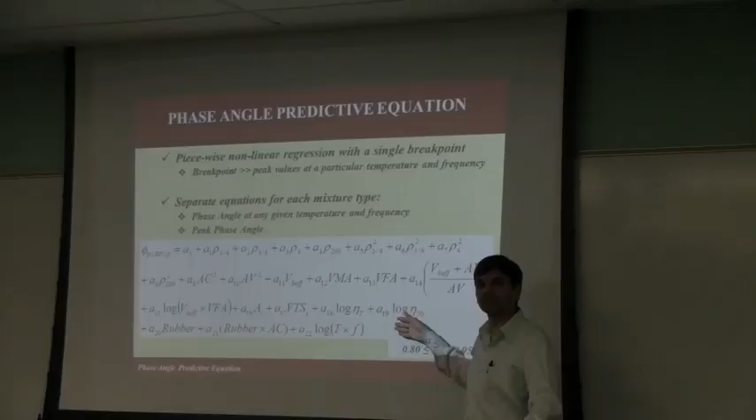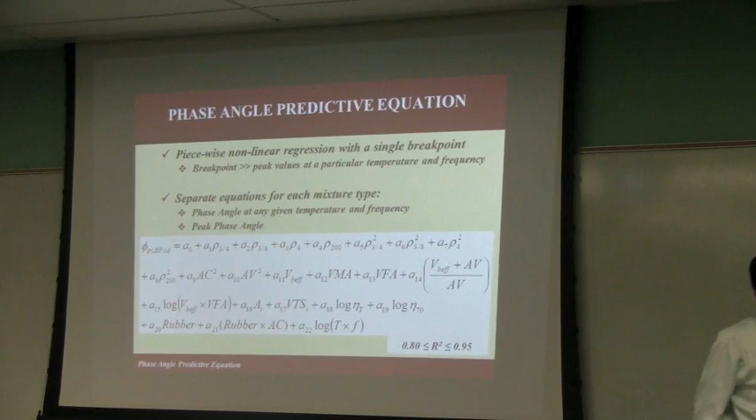Slightly better. Right now this is a non-linear... meaning it's still a linear model. Okay, but we can change this in terms of this. One of the ideas will be to change this to this pattern.

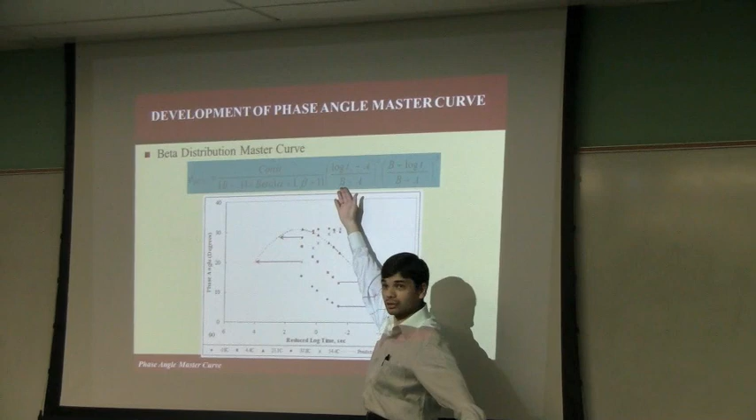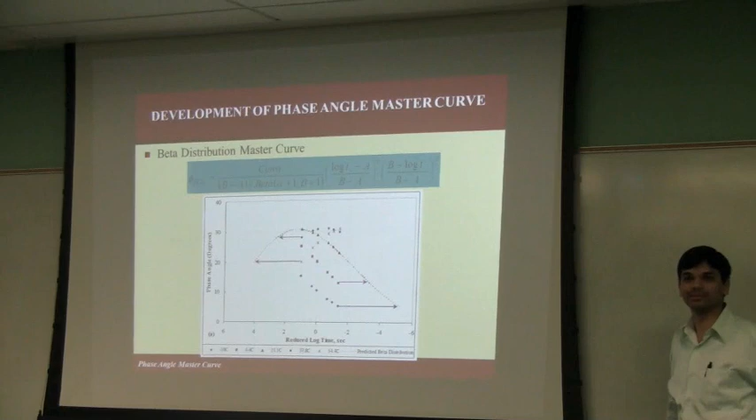The same pattern that you see in real experiments. It will be a beta distribution that we can use, or a similar distribution, maybe a normalized distribution. But at this time, that's the only one we have right now. We haven't validated it yet. That'll be the next step.

This is more of advanced science that was done recently. If you consider phase angle relation with vibration of the material, does vibration really affect more of the structures part here, going more deeper into the material science? I don't know if we have more time here, but...

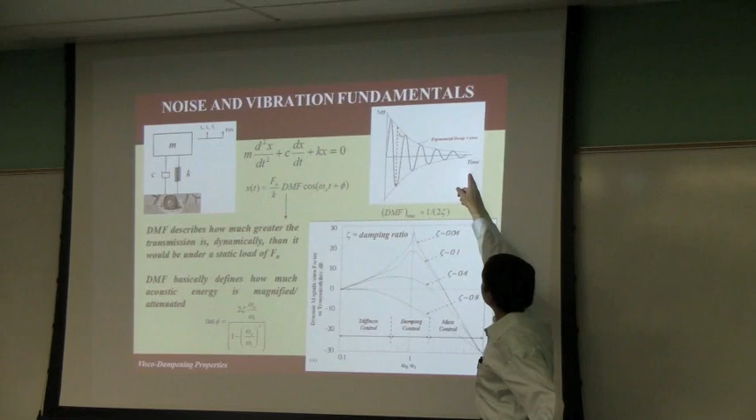Assuming that noise is very similar to a harmonic motion, like you're walking on a surface, there is a decay, an exponential decay of noise with respect to time. Okay, so that's what you see here. So there could be three components, and this is coming from acoustics, physics.

So there are three different components. One of them is stiffness, which is inherent of the material, or which is coming from the E star that I mentioned. So that's one parameter, but there could be strength as well. Stiffness is already an inherent characteristic of the material.

Then there is mass, which you measure. But then there is something called C, which is the damping coefficient. So each material has its own damping characteristics. It's more of the acoustics that we are dealing with.

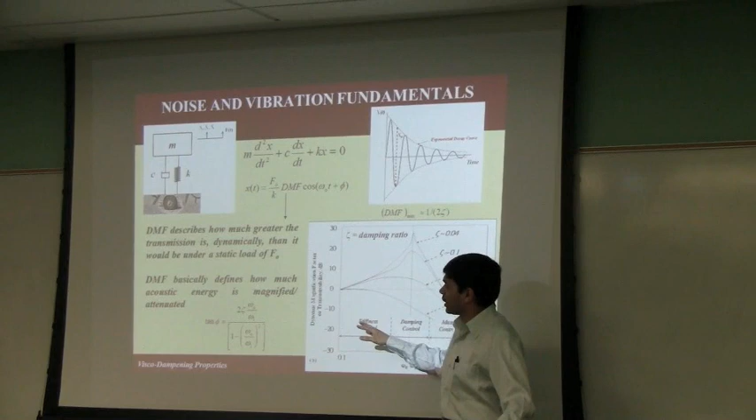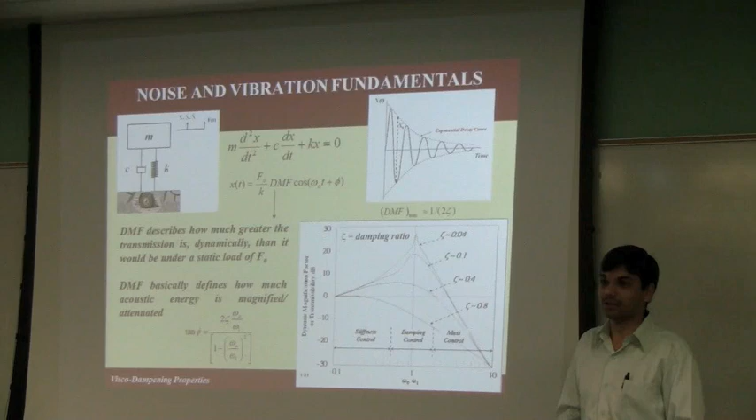So, advanced science here. When I actually researched, there was a relationship with phase angle and the critical damping coefficient. That's already there in the literature, but we haven't used this in terms of how we can characterize noise in pavements.

What was done here is that we characterized the same material, because we had phase angle values for all these mixtures. We could characterize into three different zones: one is stiffness control, damping control, and mass control.

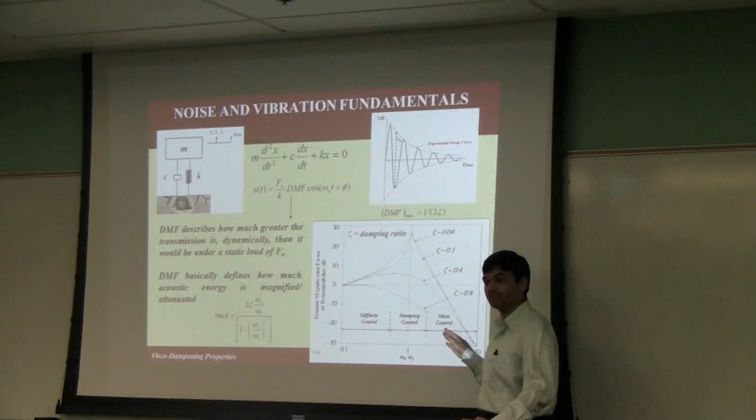The thing here is that mass control is very difficult to really control, the mass component. Because it can change due to volumetric changes, there could be changes in the material.

And stiffness can be really controlled. If you load the material with one vehicle versus 10 vehicles, you can actually vary that, so it's really very easy to control. In a real field scenario, if you want to control the material's noise, you will have to control this damping part.

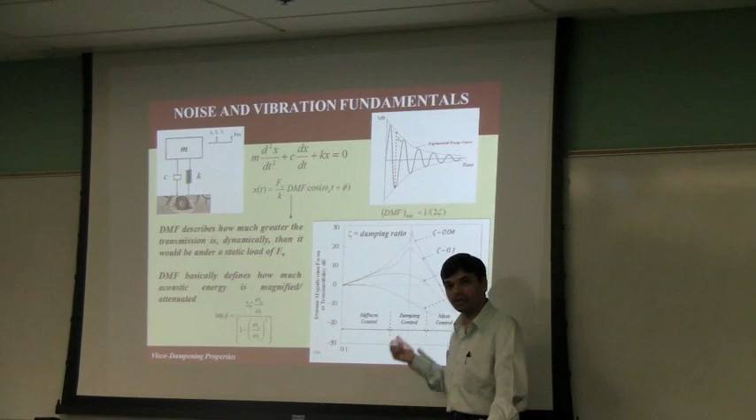So what was done was to calculate damping ratios of the material and relate it to phase angle. And what was found here was really interesting. This is actually just a 2-month-old study, so I included that in this presentation.

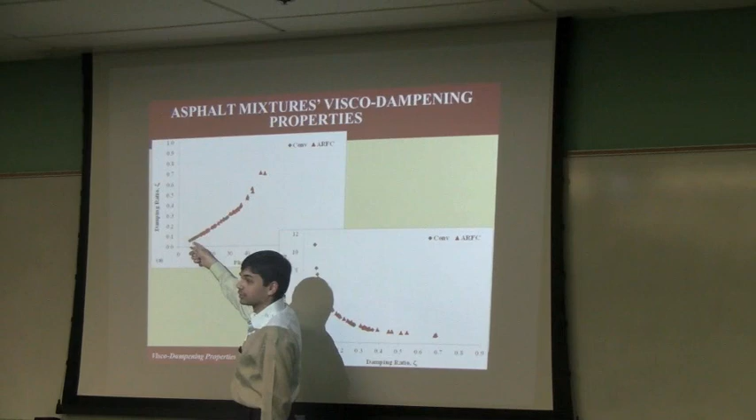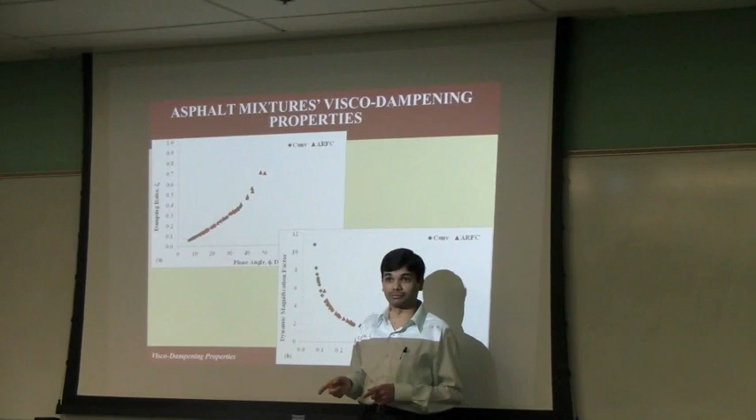You see that the black color points here are the conventional materials. The phase angle values are by themselves lower, as you had seen before. So the damping ratios were also lower because they are both directly related, directly proportional to each other. But for asphalt rubber mixtures, it was really higher damping that you saw.

The damping ratios are almost closer to about 0.7, and that's what you want - you want the material to be really less noisy.

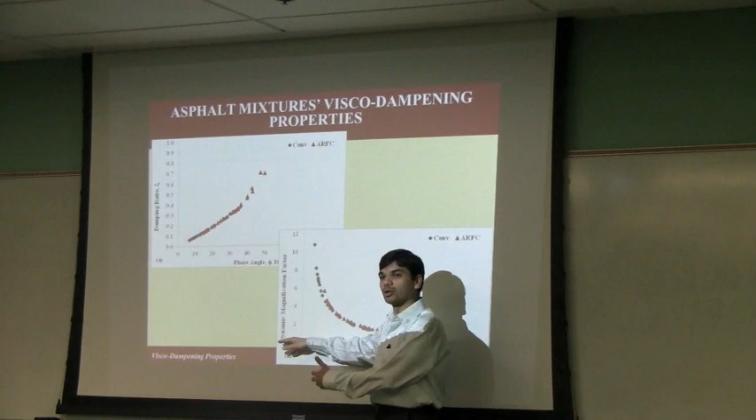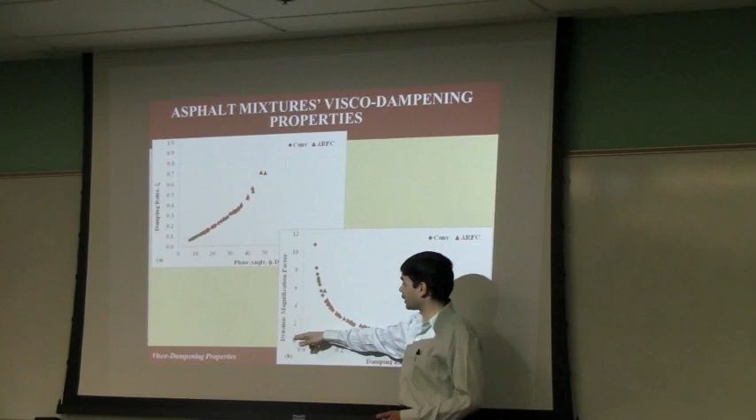When you compare the dynamic magnification factor - this is one of the other parameters there in physics - this factor defines if the material really absorbs or reflects noise, reflecting the damping part. We found that asphalt rubber materials have not only higher damping ratios, but lower dynamic magnification factor. What does that mean? It actually does not magnify, but it actually attenuates.

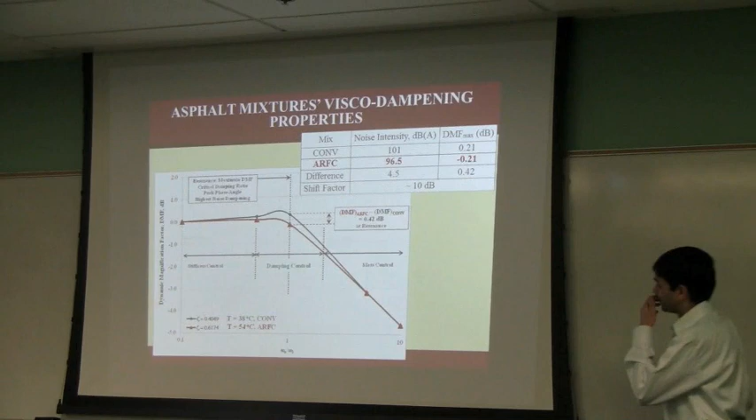It reduces noise. So what was done in the next stage was to actually calculate this. It was really replicated from the theory, into 3 different zones, where we already have the peak phase angle values.

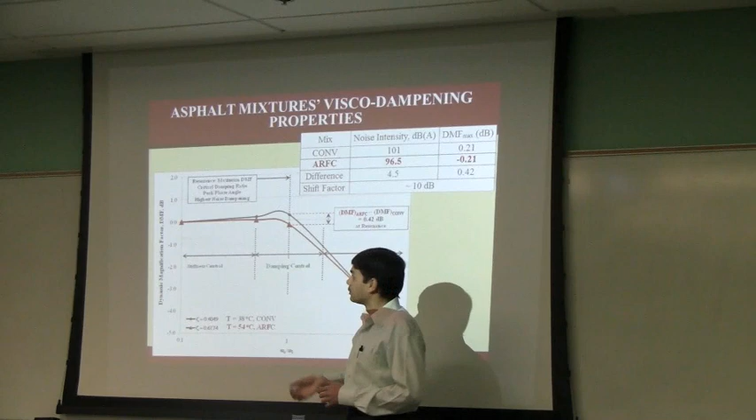From the experiments, we confirmed that this is one of the distinguishing parameters that can characterize noise of different materials. Using that, we could calculate the dynamic magnification factor at peaks, or peak resonance, meaning high damping.

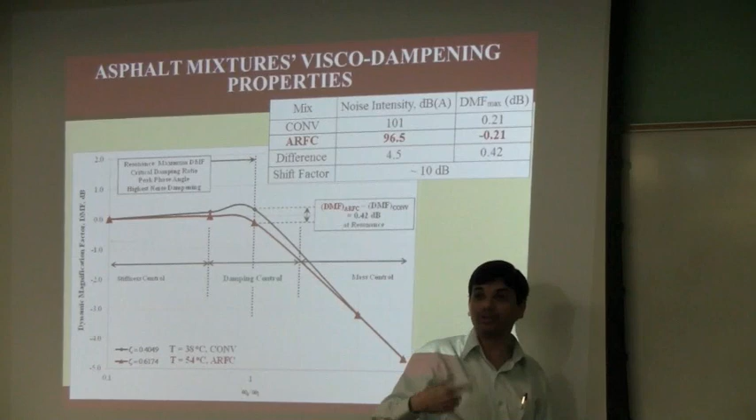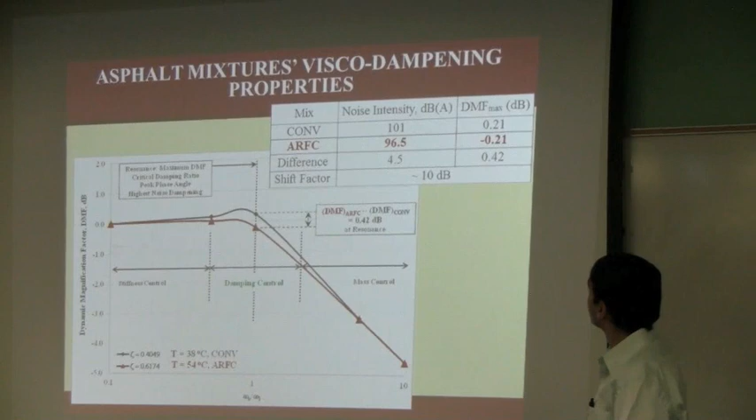So we found that there was about half a decibel difference. We translated the dynamic magnification factor value into a normalized decibel scale, and saw a 10 decibel unit change. This table gives noise intensity values for two different materials, conventional versus asphalt rubber, along with the dynamic magnification factor at peak or resonance translated to decibels. We have about 4.5 decibels average difference here, and about half a decibel here.

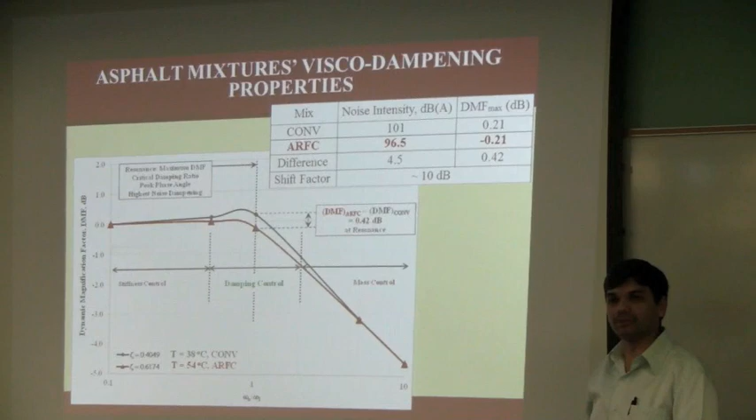There could be some shift. This is still under development, so I'm just showing you some slides here. But we could easily characterize that in the damping zone there was a difference in dynamic magnification factor.

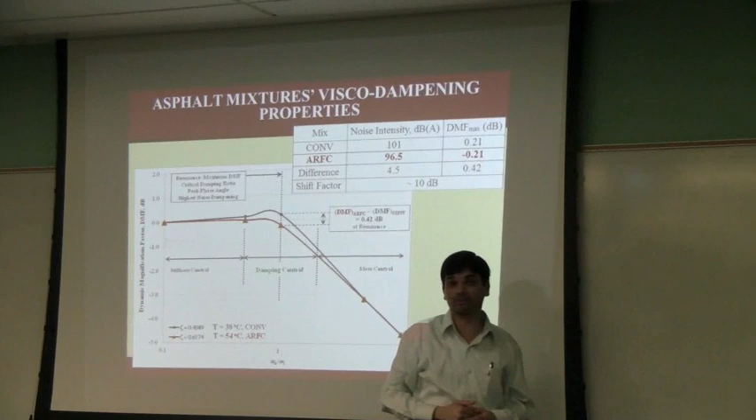So how did we relate our phase angle values to field noise? Higher the values of phase angle, or the peak values, lower was the noise coming from the field.

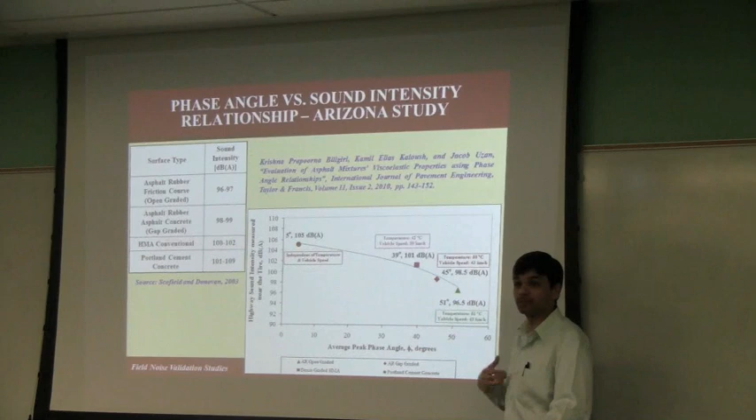We also had the frequencies or speeds at which this low noise could be achieved for different materials. At 43 kilometers per hour, we could achieve the lowest noise for asphalt rubber mixtures—that's about 45, which is about 25 to 30 miles per hour. So we're able to see those changes for different materials.

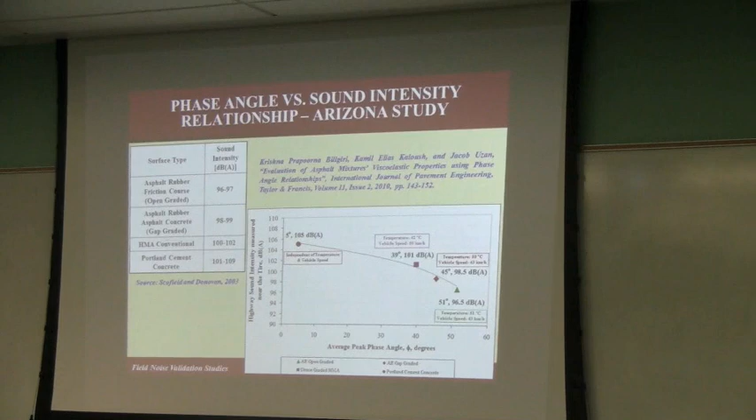That's the same table you saw in the beginning. So using this, if we know the phase angle values and the noise characteristics, we can actually achieve this.

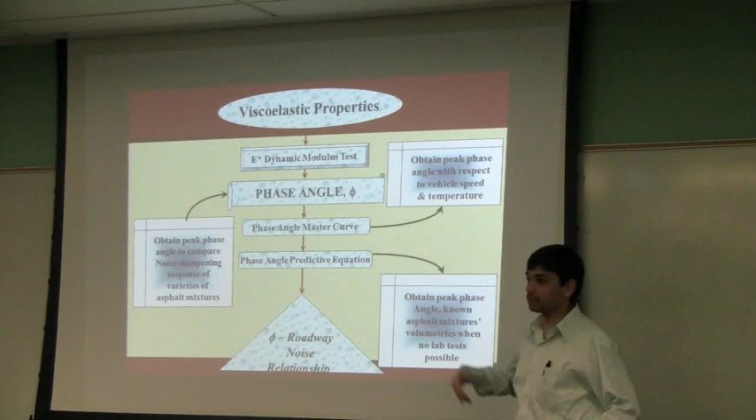This is more of the science or lab part to distinguish different materials. The same concept can be used for different materials—it could be polymer modified, or with different proportions of rubber in the material, 10 versus 20 versus 30.

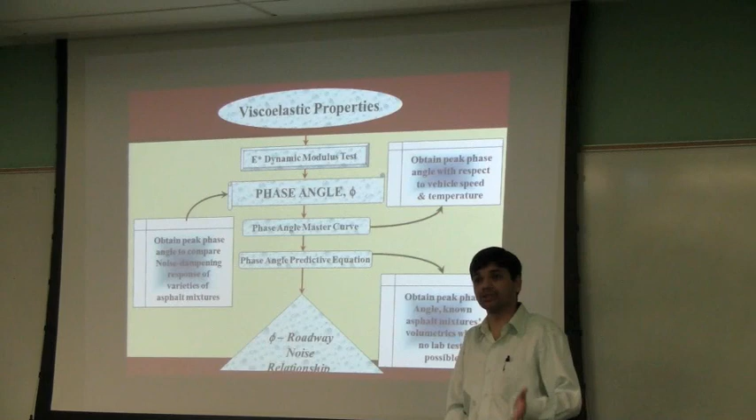Okay, so this is the first part, and I think I covered the whole thing in one hour. I think this next part will go faster.

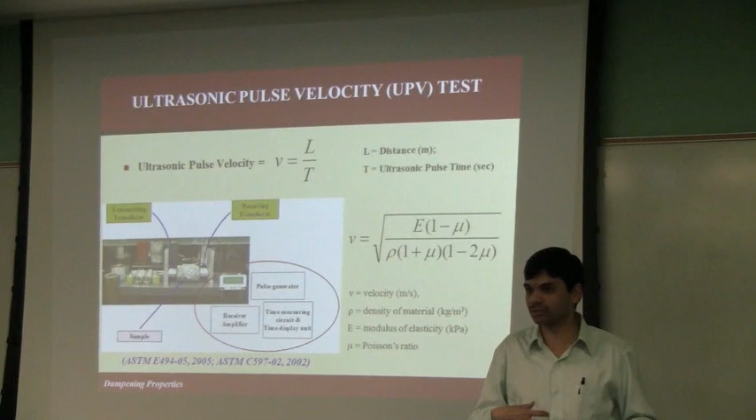The Federal Highway Administration noise model I showed you in the beginning had one part which could be changed, which was the flow resistivity. As the name suggests, flow resistivity means flow is resisted by the material—it's being absorbed, the noise is being absorbed. The lower the value, the better it is.

How could we actually characterize that in the lab? There's no test at all in the world that can characterize that value. If we can contribute these flow resistivity values for different materials, that can be directly input into the Federal Highway Administration noise model—that will be one of the major contributions from the materials aspect.

We used an already existent experiment in ASTM, ultrasonic pulse velocity, which is used to measure cracks in concrete, and you can get the values of ultrasonic pulse velocity. Here you're impinging a wave in an ultrasonic range, higher than 20,000 hertz, using a transducer which is 25, 30, or 40 kilohertz or megahertz.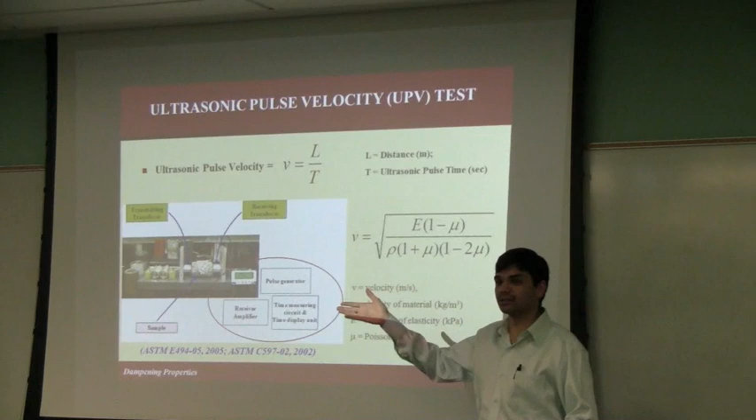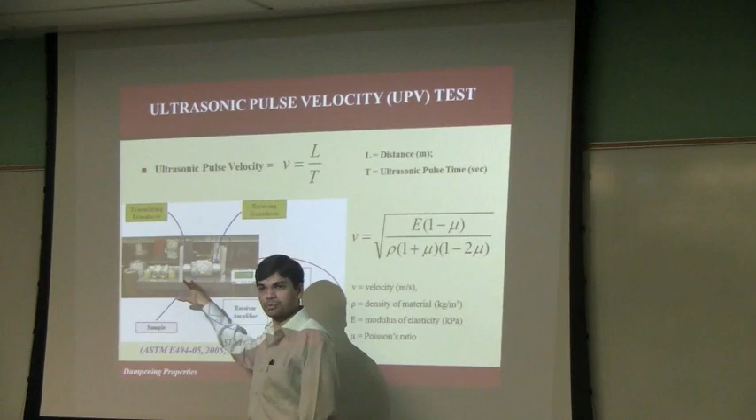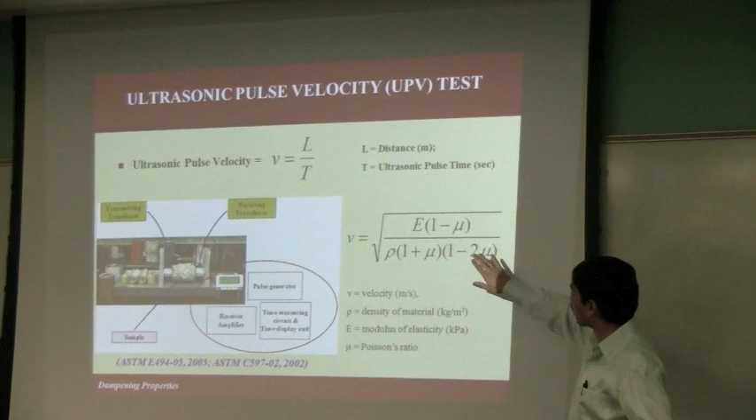You impinge a wave through one transducer and capture it at the end of the other sample, then translate that into velocity. Basically, you have a sample, impinge a wave from one transducer, and it traverses through the sample, so you're capturing the time it takes from one end to the other. Then knowing the sample length, you can calculate the velocity of that acoustic wave. It's already there in the ASTM standard.

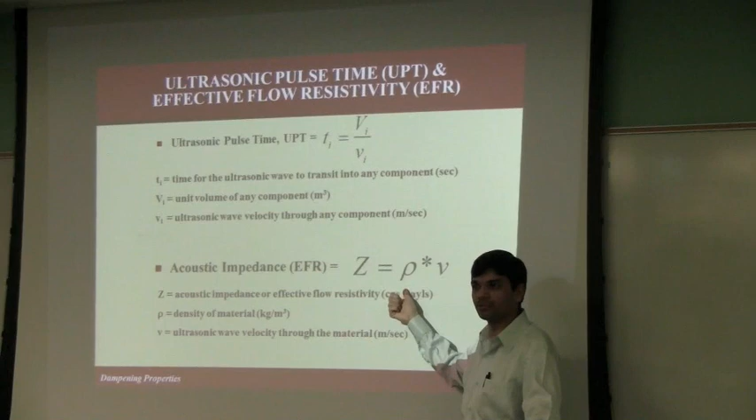So what did we do with these velocities of the different mixtures? We could calculate something called the impedance, which is still a material property. You know the velocity coming from the experiment, and you know the density of the material from the mix design—if you take the product of these two, you get the impedance value.

And what is this impedance? It's nothing but the effective flow resistivity that's there in the FHWA traffic noise model, which has the same units, CGS rayls.

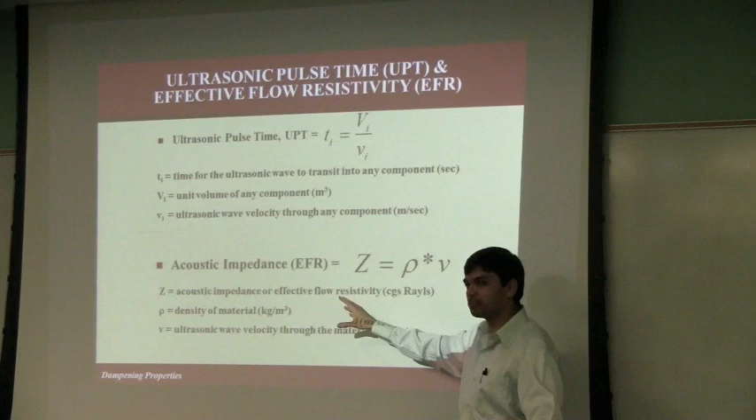So if you take the product and do some manipulation, you actually get to this unit CGS rayls.

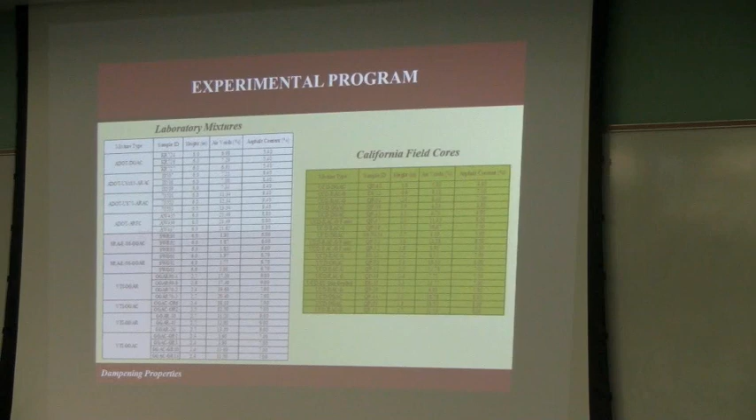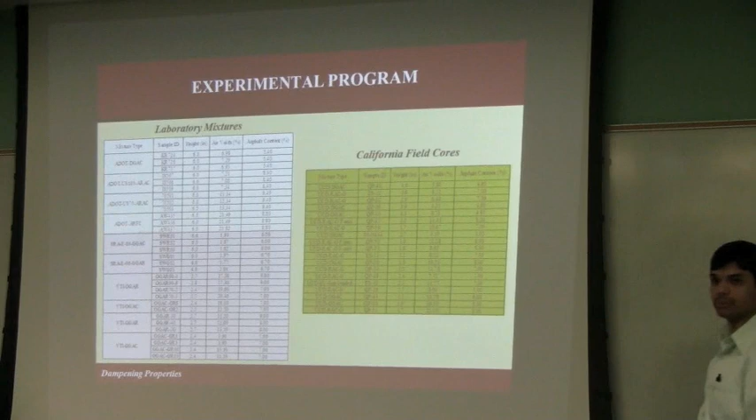So what did we do? We had 80 samples coming from University of California, Davis, as well as from Sweden and our own ADOT mixtures, for different asphalt rubber, open graded, with and without rubber. We also prepared some of them in the lab, and these are the field cores, taken out from California sites, from UC Davis, UC PRC, and we had some field cores from Arizona, California, and Sweden.

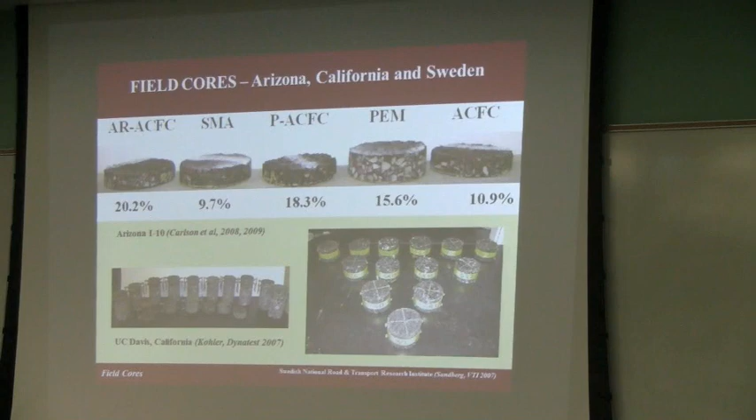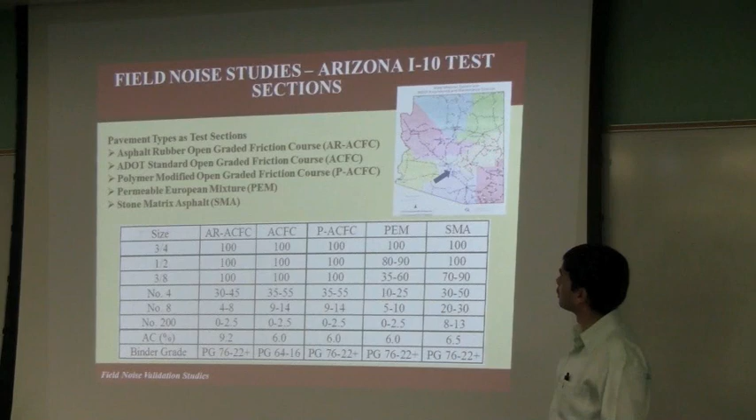So these are the pictures that you see. We also had some European mixes with and without rubber. This is the field site, very close, actually going towards Tucson on I-10. We had 5 different mixtures there, and I'll show you one figure which is really interesting.

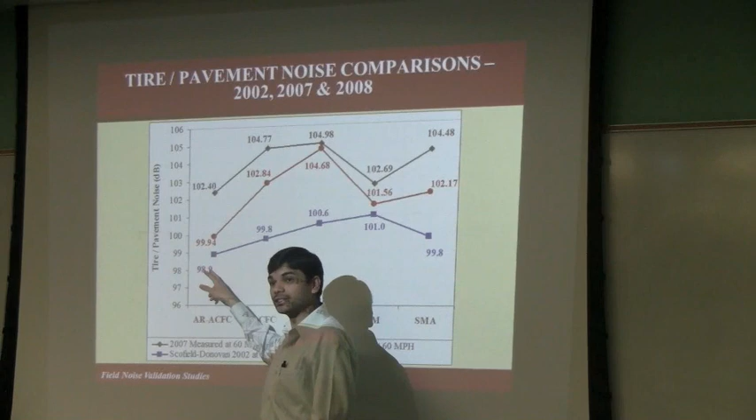The noise was measured at different times, in 2002, 2007, 2008, and actually in 2011 we measured it last year, but I don't have that here yet. We saw that asphalt rubber friction course was least noisy in all 3 years, and it still functions so well that there is no crack at all on those pavement sections. I had visited this last year. There is no crack at all, even after 12 years.

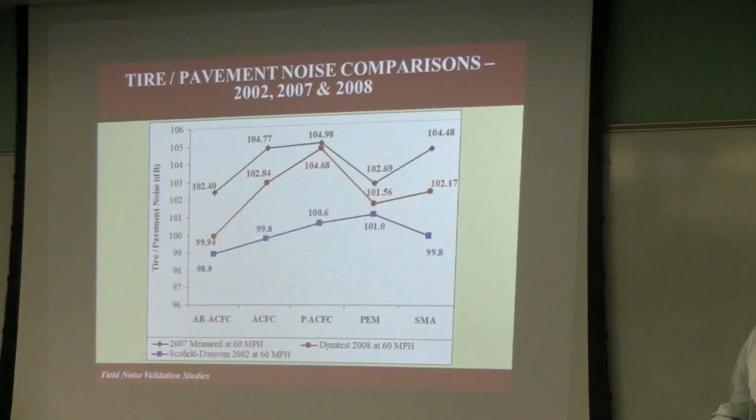But the other sections really developed cracks. And to answer the question you asked in the beginning, do these distresses actually change the noise characteristics? It does change. So when we went back to the data, this was taken immediately after construction.

The permeable European mix had cracks in 2007. But then the cracks started to heal in 2008, so the values started to reduce. And it was the other way around for another section: the cracks were not there here, and there were cracks in 2008, the values increased. So there is some association with the distress as well.

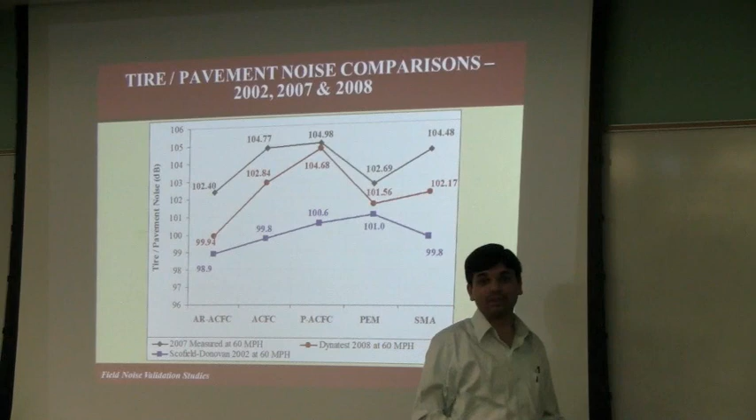There were no cracks at all whatsoever here. So what happened? Why did the values increase? Mainly because it started to age, and the binder effect started to diminish. So after 11 years of service, it has not cracked, but the noise characteristics have actually deteriorated. I would say about 3 decibels change, about half a decibel every year, which still goes back to the same literature we have seen.

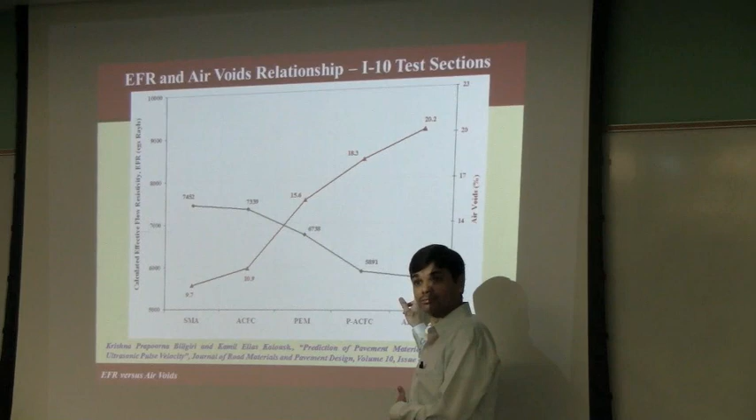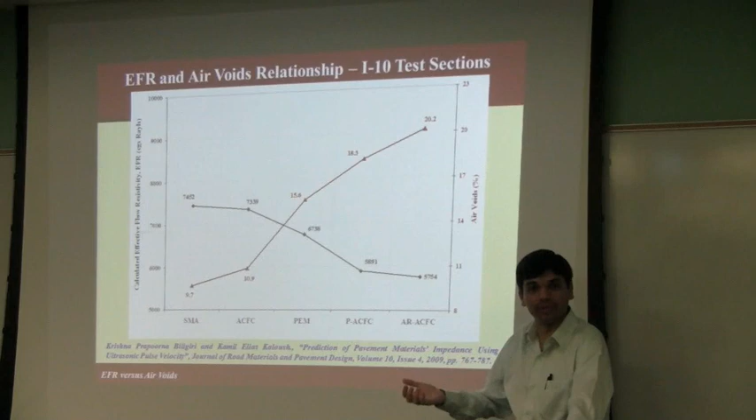So we ran the ultrasonic pulse velocity on the same mixtures we obtained from Arizona test sections. As I told you, the lower the value, the better it is. So the lowest value for flow resistivity was observed for asphalt rubber mixtures, which had the least noise and high air voids. And the other way around, if the value of EFR was higher, the noise was higher too.

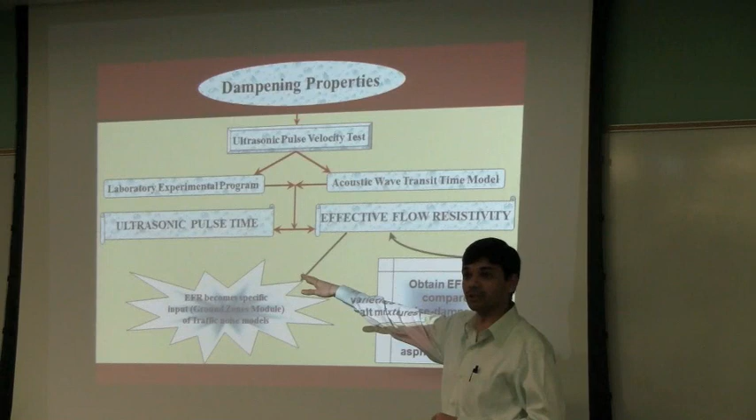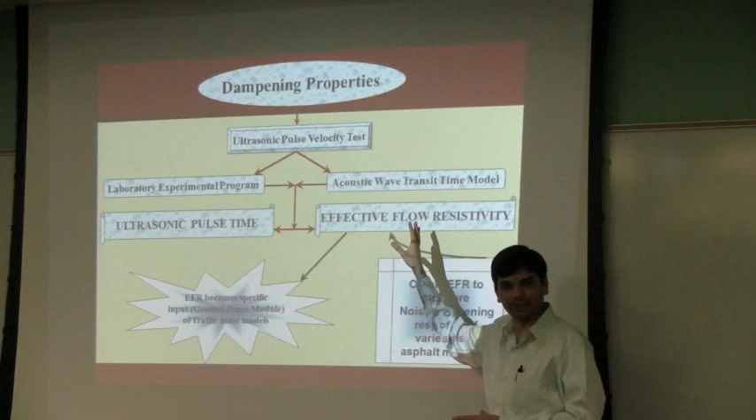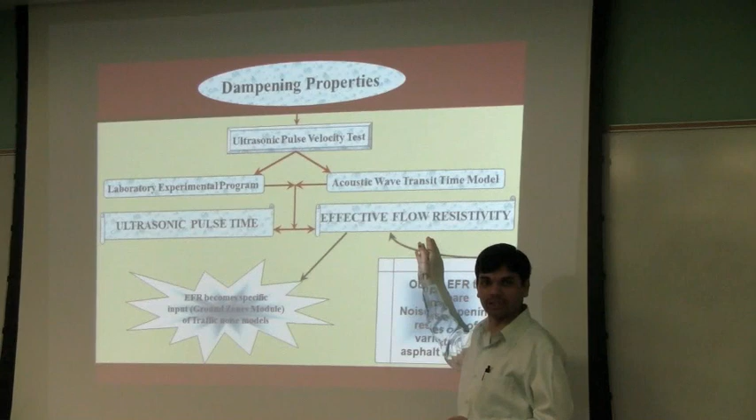So what could be done using this experiment? Just 2 more slides and we are done. We can actually do a laboratory experimental program using this test - it's already an ASTM standard, so we are not inventing it. We also developed a model which I didn't show here, and we had really excellent correlation there as well. You can capture the time values, translate it to velocity, and calculate flow resistivity of the different mixtures, and that can directly go as an input in the TNM.

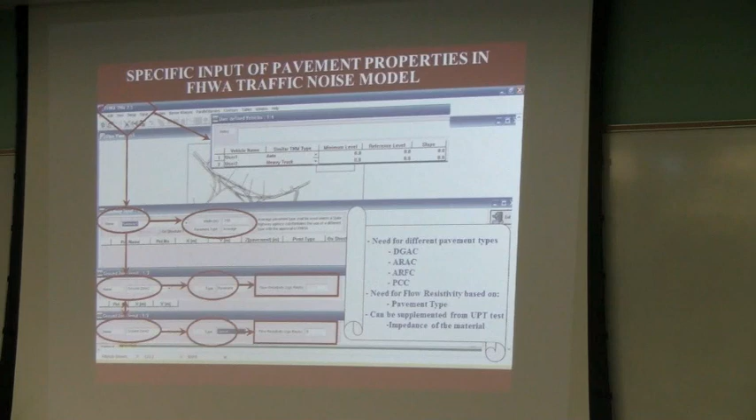So basically what you're doing in the module that we have, instead of really having it as an average here, if you characterize the flow resistivity values of the different mixtures, you can input that here. So you can basically customize it.